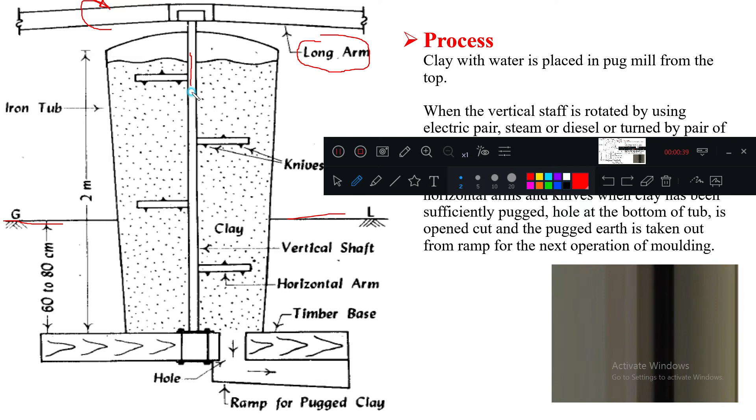This rotating arm can be rotated around its vertical axis. For this big long arm, horizontal arms are attached, and to these horizontal arms knives are attached. Here we have marked the knives. This is called the vertical shaft, and these are the horizontal arms.

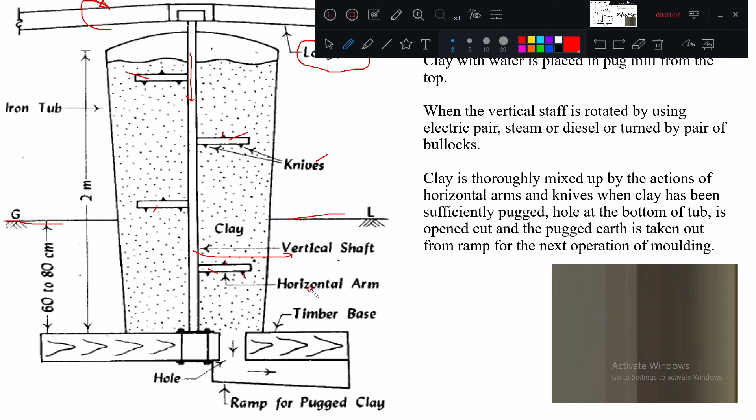What is happening? From the top, clay is fed. So what is the tempering process? Tempering is nothing but obtaining the right, correct water quantity for the clay, such that it can be molded into the required shape.

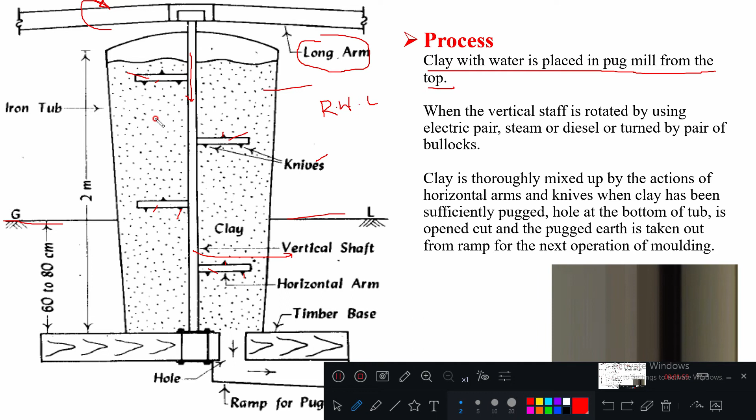Clay with water is placed in the pug mill from the top. This total setup is called a pug mill. From the top, clay with water is added, and it is continuously rotated using manual force, animal force, or electrical force. With that rotation force, these horizontal arms also rotate, and the knives make some action such that the total clay and water is thoroughly mixed. This process is called pugging.

This is called a pug mill, and this is called tempering. Tempering is done in the pug mill. After the tempering process, you get pugged earth, and this is used for molding.

This vertical shaft is rotated such that the clay is thoroughly mixed. The vertical shaft is rotated using electric power, steam, diesel, or by a pair of bullocks. Whatever may be the source of power, it is possible.

Once that complete process is done, what is happening here? Clay is thoroughly mixed by the action of horizontal arms and knives. When the clay has been sufficiently pugged, there is a hole at the bottom of this tub. Here it is, the bottom opening.

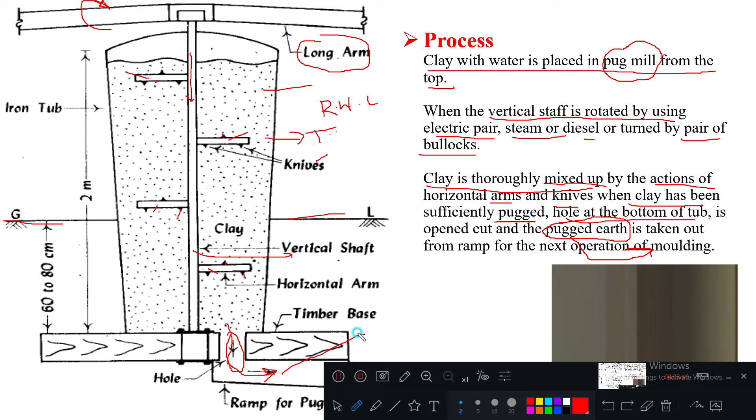From this, the pugged earth or clay is taken out. Taken to where? Exactly for molding. So it is taken to the molding process.

I hope it is clear. So you'll be asked about the tempering process, and you need to draw this sketch and explain the process. This is a ramp to collect the pugged clay.

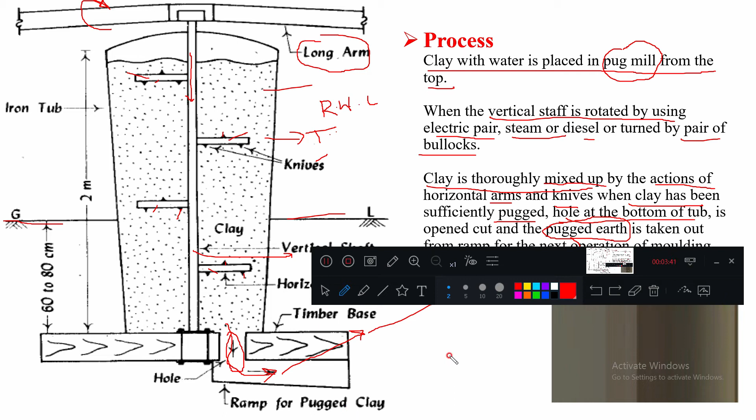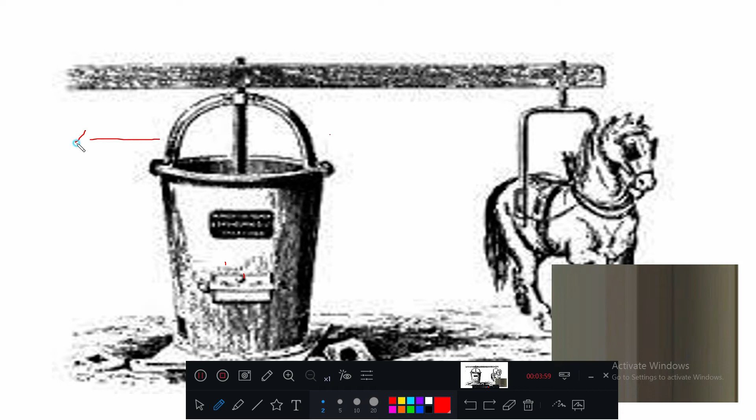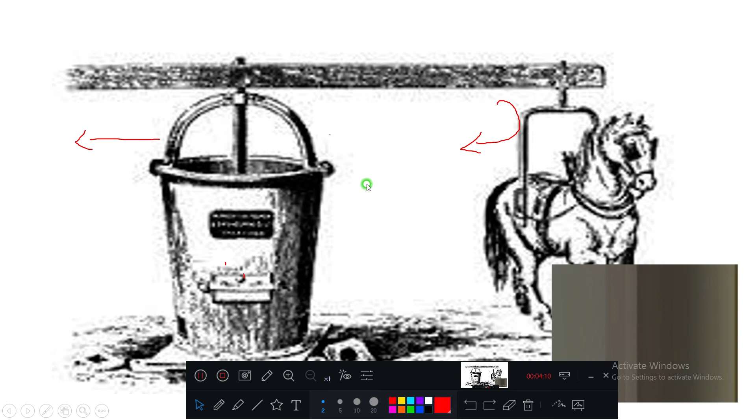In this diagram also you can easily see. In olden days, this is a pugging mill, and using animals also it can be done. Here the clay and water is added, so it is continuously rotated. It is a machine.

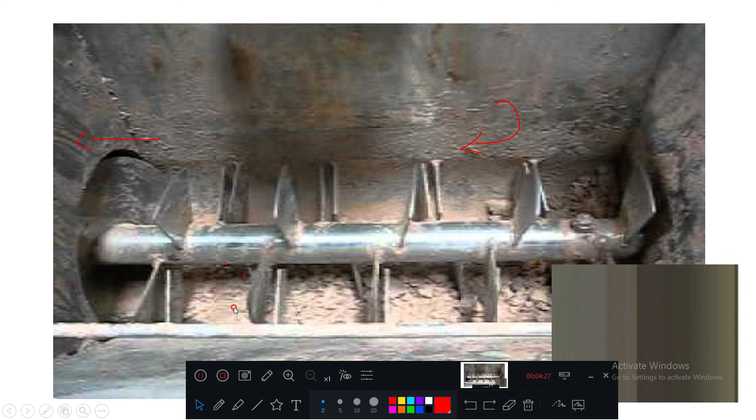This tempering process is usually done by the machine. Here we have the vertical shaft, horizontal arms, and knives also. So continuous mixing is done.

From there you can go for the molding process, and from there they prepare these molds.

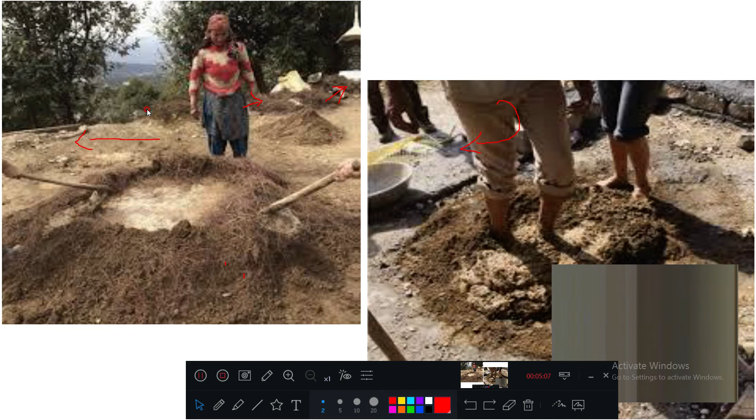Here also you can see a combination of preparing the earth as well as tempering for small scale works. Continuously applying pressure and mixing is nothing but the tempering process.

Here is the next process: first is preparing the earth, that is completed. Next is the molding process. Clay which is prepared from the pug mill is sent for the next operation of molding. Following are the two ways of molding: hand molding and machine molding.

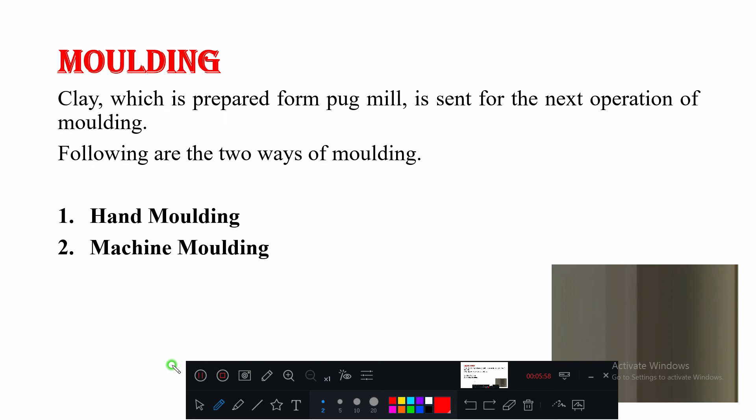Here you can see molds are rectangular boxes of wood or steel which are open at the top and at the bottom. Steel molds are more durable. Obviously it will not get easily contaminated, and it is generally used for manufacturing bricks on a large scale.

Another classification: bricks can be prepared using steel molds as well as wooden molds. Another classification is ground molded bricks or table molded bricks. So depending on which platform you are using for preparing the bricks, it is called ground molded or table molded.

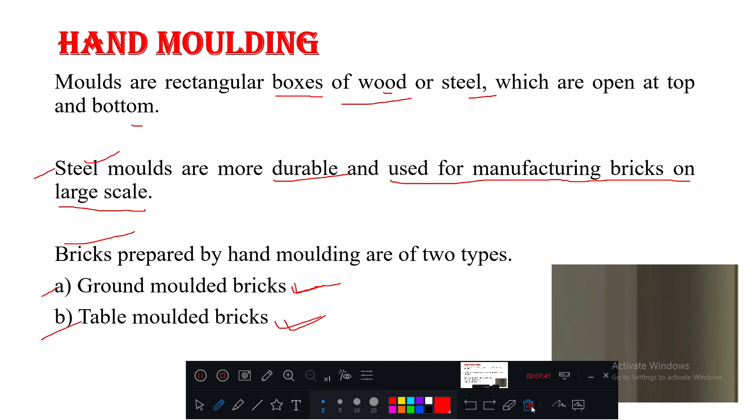This is shown here, the plan and elevation of the molds, steel molds or wooden molds. Here you can see the ground molding operation.

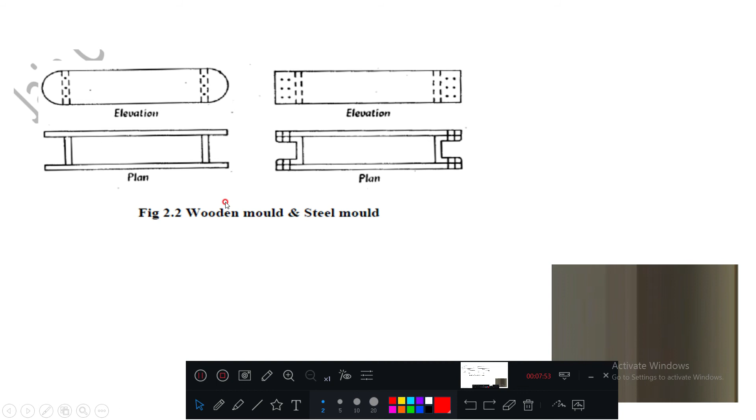Ground molding operation. First, what are they doing? They are preparing the earth, meaning they level the ground. On that level ground, they are putting this mold. In that, they are filling the pugged earth or clay inside it and taking it into position.

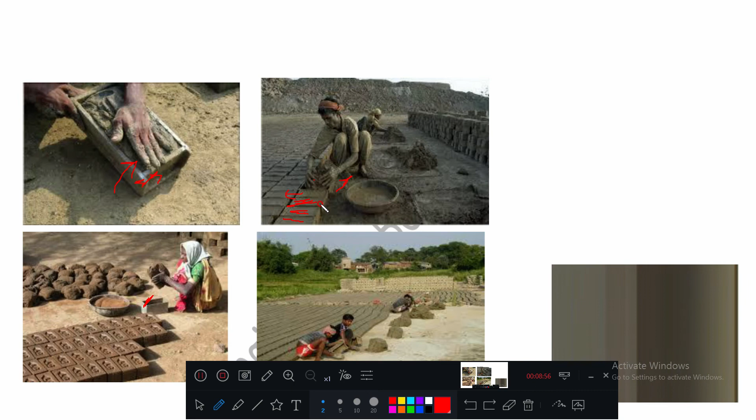After placing it in position, they remove only the case, this top portion. So the clay stays there only. This rectangular box, after removing, the clay appears in the form of a brick. The extra surface is removed or cut off, so you are getting the brick shaped clay.

So on the level ground, they are putting the molds. Inside that they are putting the clay, leveling, compacting, removing extra, and lastly taking that mold to the next location so that you get the bricks. These are wet condition bricks, so they are keeping it for the drying process.

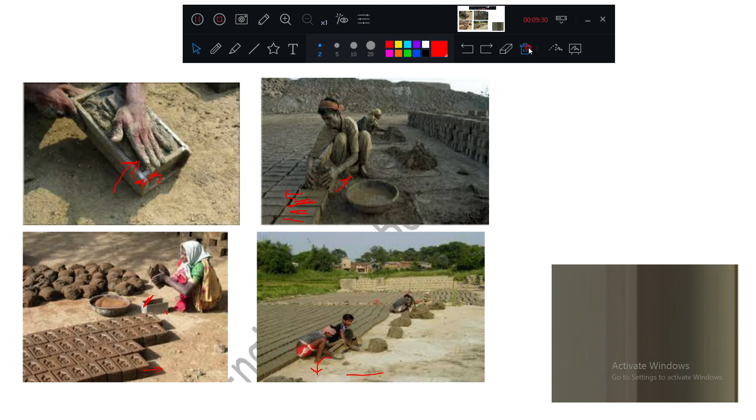So in ground molded bricks, what is the procedure? First, the ground is made level. Fine sand is sprinkled over it. And the empty mold is dipped in water and placed over the ground to fill the clay.

The mold is dipped inside the water so that any clay attached is washed away, and placed over the ground to fill the clay. Next, after placing the clay, the extra clay is removed by a wooden or metal strike. If some clay is extra here, you can easily remove it with a steel edge or knife, something like that.

They generally call it a metal strike. So after the mold is filled, a little bit of pressure is applied, then it is lifted. After filling and compacting at one location and removing the extra, it's again taken to the next position. So the raw brick is left on the ground. These are called rough bricks or raw bricks.

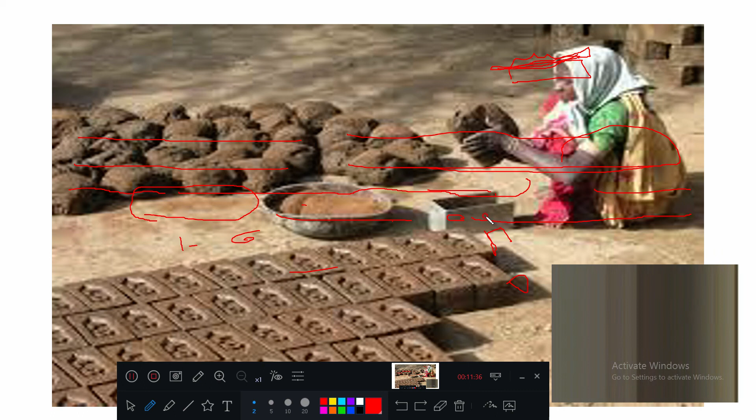So you can see here, these are the raw bricks. So, level ground is the first step. Fine sand is sprinkled, some sand is there. This mold is dipped in water, placed in position, and she is putting the clay here. Later on, it is removed to the next location.

Okay, here what have they mentioned? The mold is dipped in water every time, then the lower faces of the ground molded bricks are rough. So these are generally rough bricks. Ground molded bricks are always rough, and it is not possible to place a frog on them.

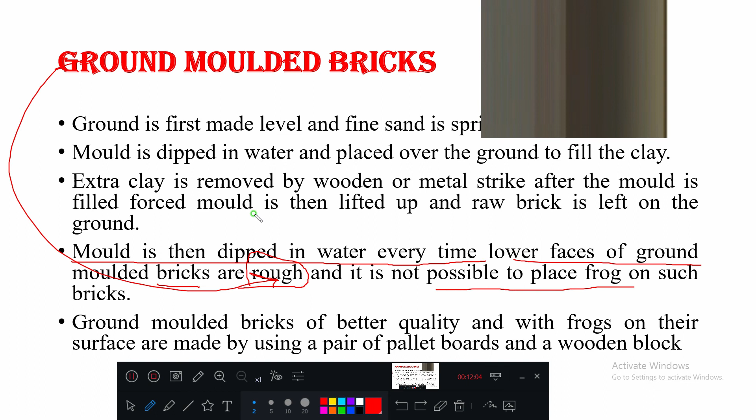Frog is nothing but, you can see in this next diagram, a key formation. On every brick there is a key. Do you see this portion? For every brick there is some indentation or mark, so the top surface is not level. All these things are called a frog. The frog is necessary to have a proper binding with the next brick or the next layer, acting as a key for bonding.

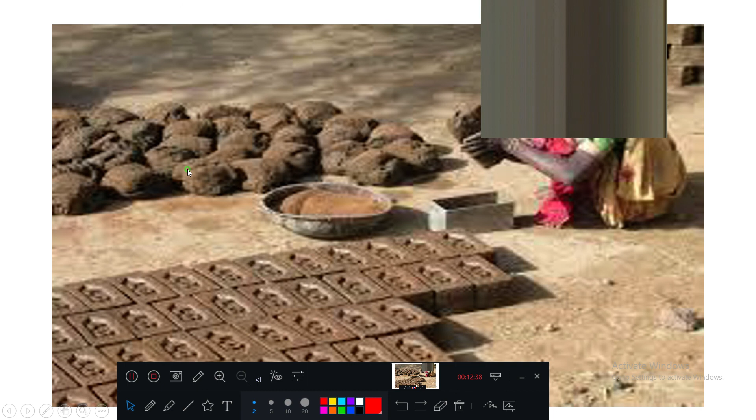So ground molded bricks offer better quality, with frogs on their surface. How are they done? With a pair of pallet boards and wooden blocks, these keys or frogs can be made.

Understand this one point about ground molded bricks: first the ground is leveled, fine sand is applied, the mold is dipped in water, clay is filled and compacted, force is applied, and the extra material is removed. Then the mold is again dipped in water and taken to the next spot.

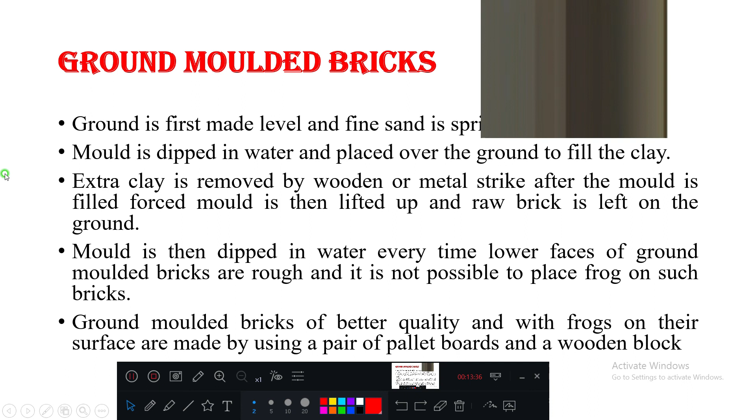You can see this preparation of the ground molded bricks. These are called ground molded bricks.

Next is table molded bricks. Everything is the same, but they are prepared on a fixed location, a table, so they are called table molded. From here they are transported to the second location. The molding process is similar to ground molding, but it is prepared on a table.

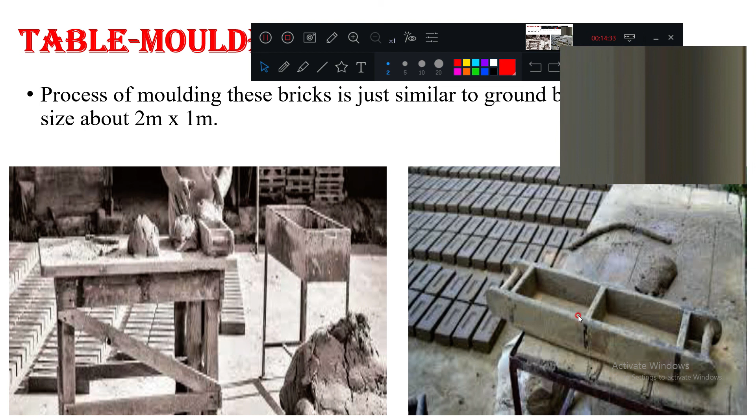It can easily be seen here, table molded bricks. Here you can see the molds. At a time, two bricks can be prepared. These are called table molded bricks.

Next is machine molded bricks, automated, used where requirement is heavy. Machine molding is done using machines or robots; clay is continuously fed from the top and bricks continuously come out. This method is economical when we require bricks in huge quantity at the same given location.

So molding is done here with hard and strong clay. When the clay obtained is very strong, machine molding becomes very necessary.

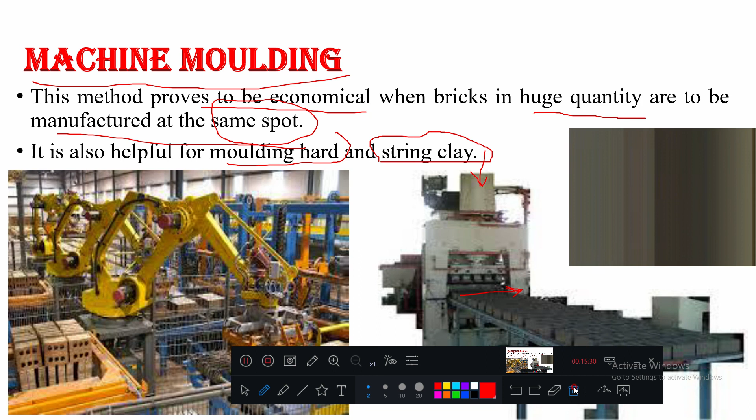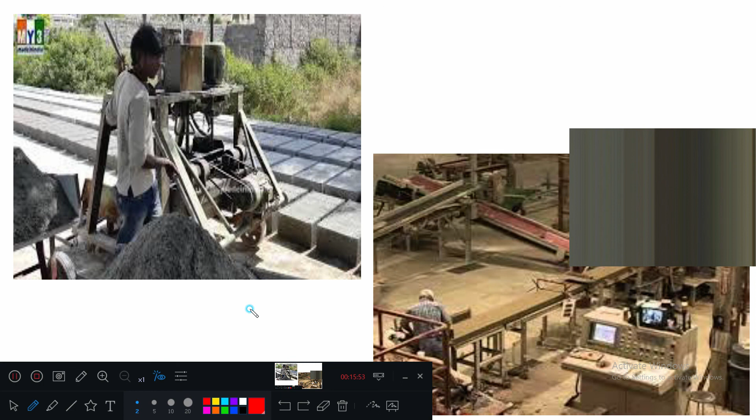You can see here, from the top raw or fresh clay is fed, and water is continuously mixed in. From here the laying of bricks is done. In a bigger factory, a continuous machinery, robotic, or computerized system is used.

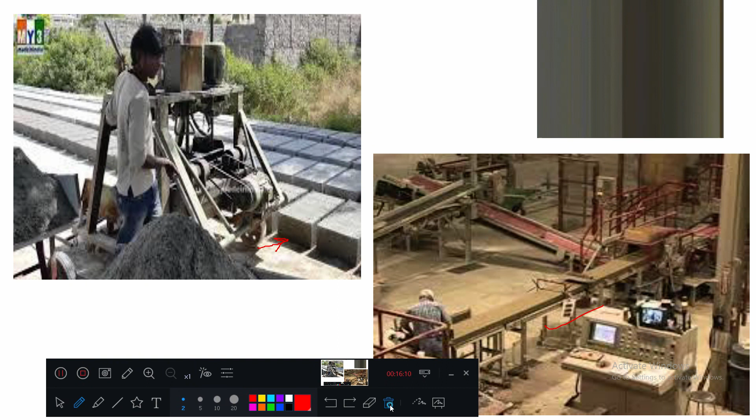Here also you can see, these are called wire cut bricks. In machine molding, continuously clay comes out of the machine, and using wires, these bricks are cut. It's a continuous automated process.

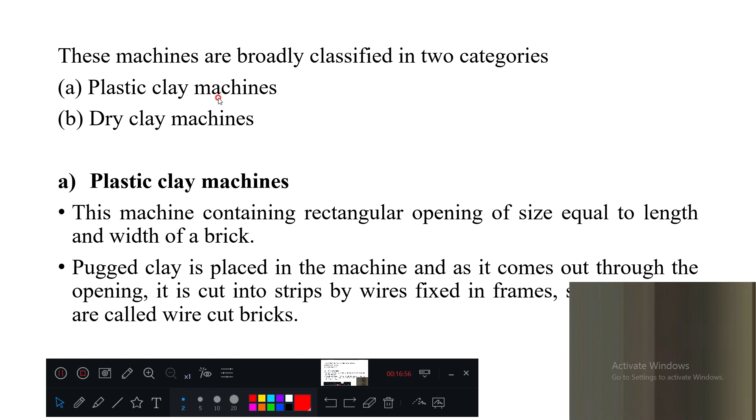Machines may be classified into plastic clay or dry clay types. In simple words: if the input fed to the machine is in wet condition, meaning already tempered clay is fed into the machine, then it is called a plastic clay machine.

Before entering the machine, the clay and water are mixed and tempered correctly, and then fed in, and direct bricks come out from there. Those are called plastic clay bricks, since plastic means it can be easily molded.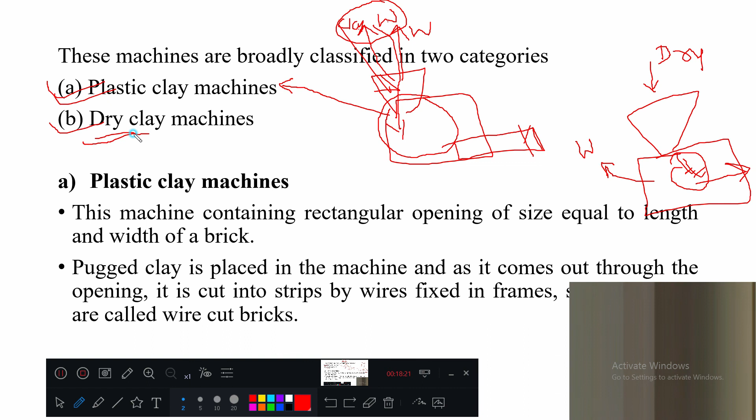Dry clay machine means only dry clay powder is fed into the hopper or entry point, and water is added to the machine separately. Here dry clay is added and water is added separately, mixing is done inside, and the outlet produces the bricks. Those are called dry clay bricks.